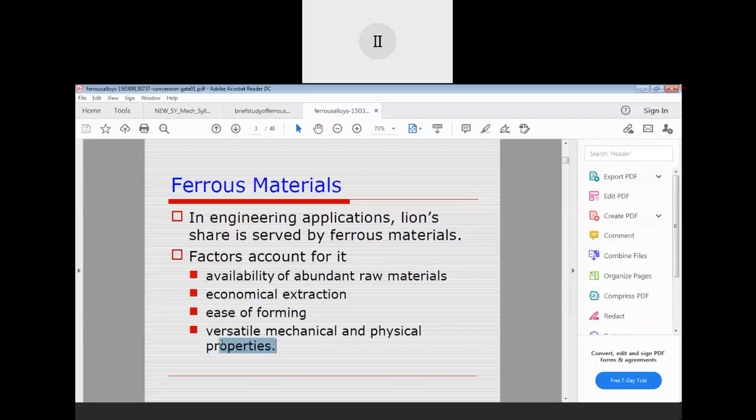Drawbacks of ferrous material. As this is very easily available, and we told that different types of mechanical and physical properties are available, at the same time there are a few drawbacks also, because no type of material is fully satisfactory in regard to all aspects of application. Okay, so there are a few drawbacks of ferrous materials. The first one is poor corrosion resistance. Ferrous materials are not very corrosion resistant.

Okay, then they have high density and low specific strength. Ferrous materials have high density and low specific strength. Okay. Then low thermal and electrical conductivities. Ferrous materials have very low thermal and electrical conductivity.

So these are the drawbacks due to which we are going for advancement of materials. Few disadvantages are always there, so we have more scope to develop new material, right? To overcome these drawbacks. So like we are telling that ferrous materials have poor corrosion resistance. So to overcome this, to have some material with high corrosion resistance, we can develop a new material, right? Or same way, if we want high thermal and electrical conductive material, then we can make different non-ferrous materials.

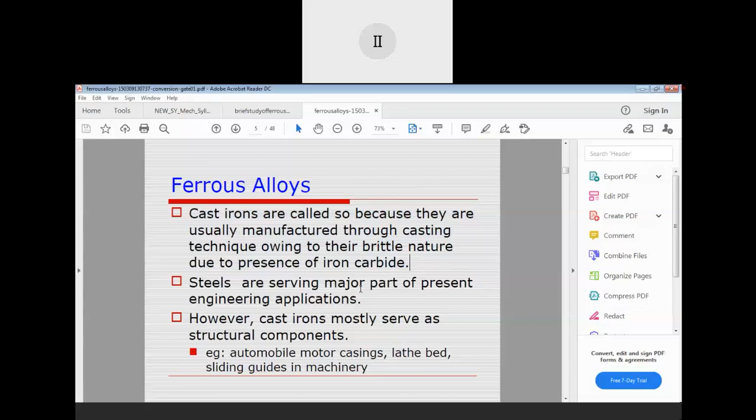Yeah. So now our next topic is ferrous alloys. Okay. Cast irons are called so because they are usually manufactured through the casting technique, owing to their brittle nature due to the presence of iron carbide. So now we will see different types of ferrous alloys. Before starting, here in your syllabus we have different types of irons: cast iron, white cast iron, and malleable cast iron. So let us see a few types of ferrous materials.

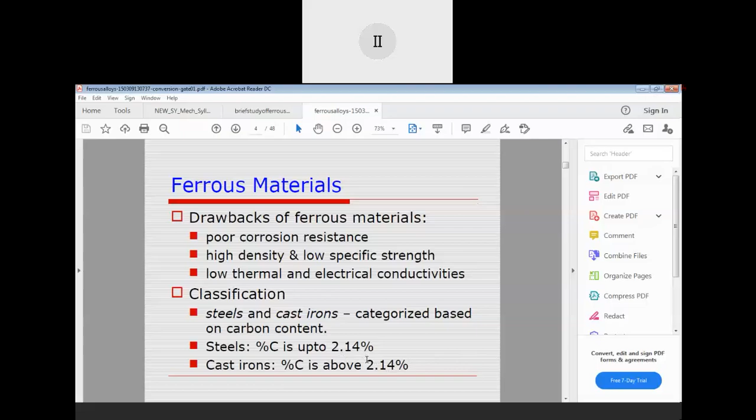In pig iron, the carbon percentage is 3.5 to 4%. There are other chemical properties too, like silicon, which is 1 to 3%. Manganese is 0.1 to 1%, phosphorus 0.2 to 1.5%, sulfur less than 0.5%, and the remaining composition is iron. This is the very basic step of iron.

This is the basic phase of raw iron. When we discuss pig iron, you need to remember their percentages - at least the carbon percentage, and it would be better if you can remember the other properties too. In pig iron, carbon percentage is 3.5 to 4%.

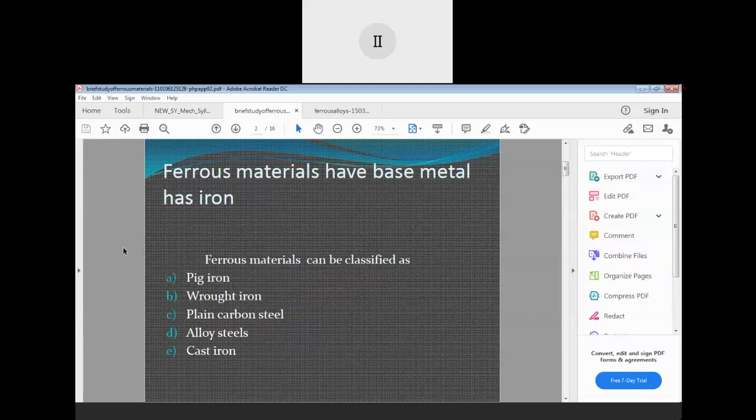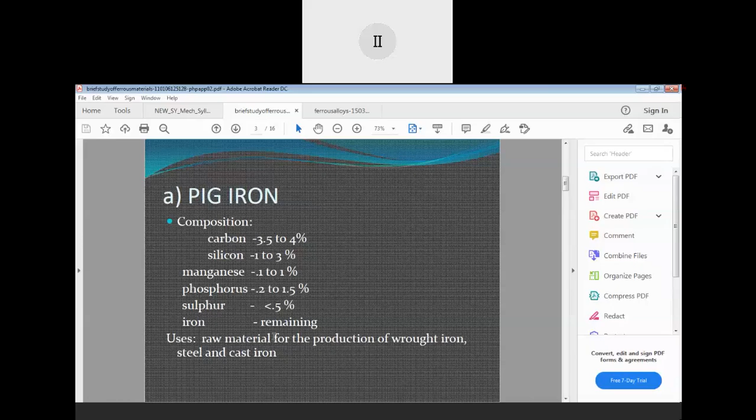If you see pig iron, wrought iron, or cast iron, you may notice very little changes in carbon percentage, but with these little changes, their properties change hugely - both mechanical and physical properties. Pig iron, as I told you, is the very basic phase, so it's used as raw material for the production of wrought iron, steel and cast iron. They are used for those purposes only.

Now wrought iron - they are produced from pig iron. How are they produced? By puddling process or by Byers process. If anybody is interested, you can check these processes in detail.

In wrought iron, we have 0.12 to 0.15 percentage of carbon. It contains high ductility and can be easily forged and welded. So in wrought iron, the properties are: highly ductile, and welding can be done very easily.

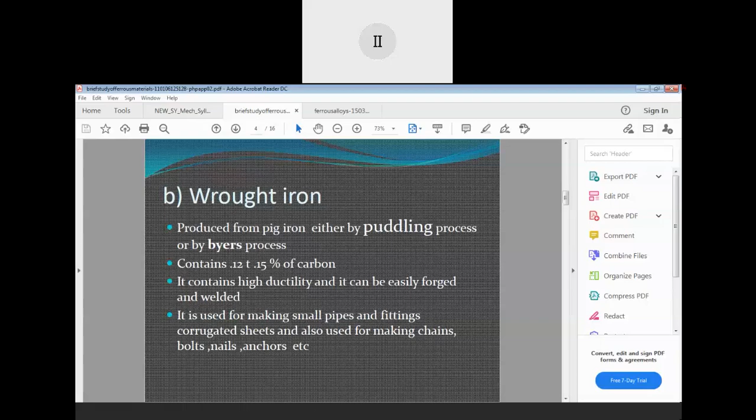Wrought iron is generally used for small pipes, fittings, corrugated sheets, and also used for making chains, bolts, nails, anchors, etc. Because you can easily forge and weld chains and bolts, and they are very highly ductile. Due to all these reasons, wrought iron is used in making small pipes, chains, bolts, nails, anchors, etc.

Next is plain carbon steel. Steel is an alloy of iron plus carbon plus small quantities of silicon, manganese, phosphorus, sulfur. So plain carbon steel is an alloy of components like iron plus carbon plus very small quantities of silicon, manganese, phosphorus, sulfur, etc.

It mainly depends on the amount of carbon content. So by depending on the carbon content, plain carbon steel can again be classified into three categories: low carbon steel, medium carbon steel, and high carbon steel. These different types of steel depend only on the percentage of carbon.

In low carbon steel, you will find carbon percentage is 0.08 to 0.3%. In medium carbon steel, meaning more percentage of carbon, it's 0.3 to 0.6%. Whereas in high carbon steels, the carbon percentage is more than 0.6%, but below 1.5%.

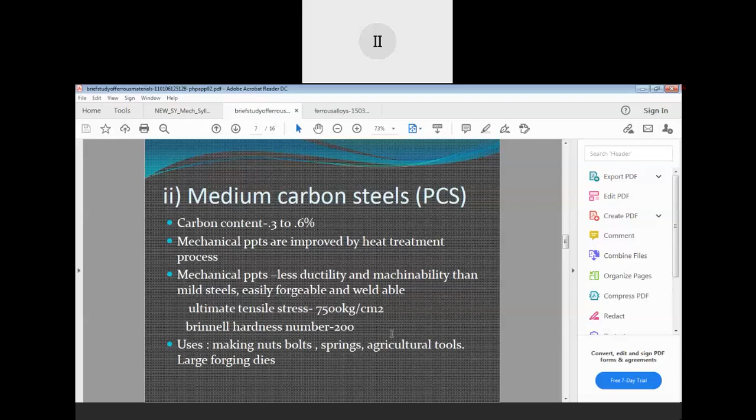So where can we use this medium carbon steel? We can use it in making different types of nuts, bolts, springs, different agricultural tools, and dies for large forging. These are the components we can make using medium carbon steel. Now, what about high carbon steels?

In high carbon steel, the carbon content is 0.6 to nearly 1.5%. Mechanical properties are further improved by heat treatment process, like medium carbon steel.

Their mechanical properties are high strength and hardness, then low ductility and low malleability. These are the different mechanical properties for up to 0.8% carbon content.

Ultimate tensile strength also increases with the increase of carbon percentage. Here you may find 9500 to 11,000 kg per centimeter square ultimate tensile strength for high carbon steel. Their Brinell hardness number is 550.

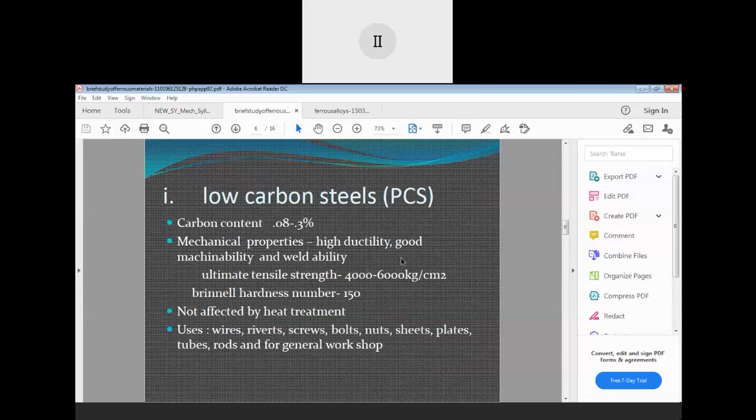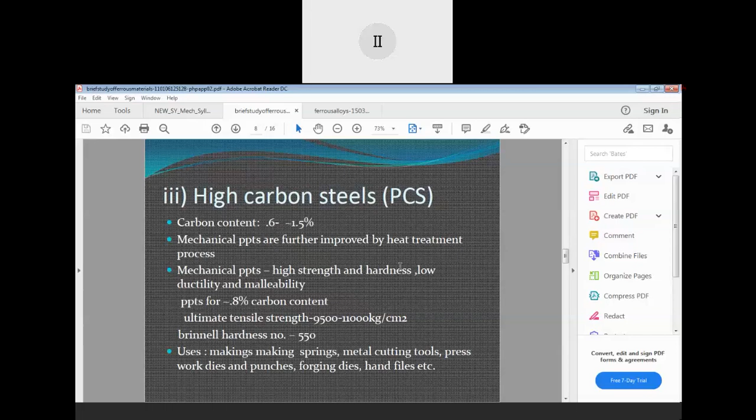So with these three types of carbon steel - low carbon steel, medium carbon steel, and high carbon steel - you may find that with changing just a few percentage of carbon, their mechanical and physical properties change drastically.

Now next is alloy steels. When we discuss different types of steel, we find that their carbon and iron percentages are there, but their properties are not good enough for higher applications, for application in places where extreme conditions exist. So to be applicable in higher, more critical situations, we use different types of metals with iron and carbon, making different types of alloy steels.

So other than iron and carbon, other metals are used to attain better properties. Why do we generally use alloying elements in steels? These are the reasons: to increase hardenability, to increase different mechanical properties, to increase corrosion and wear resistance.

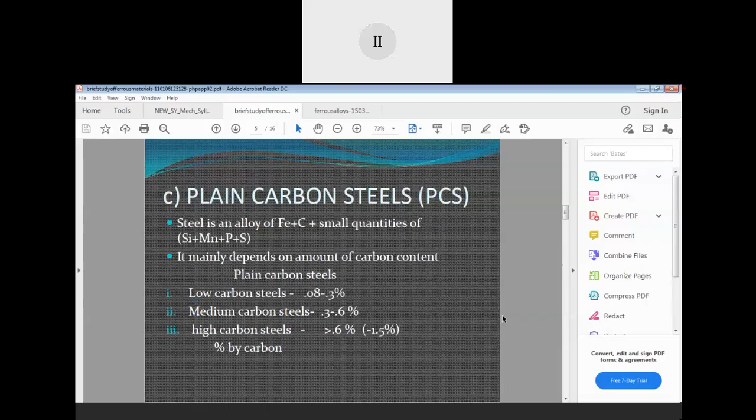Now, in your syllabus, you can see there's a point on the influence of alloying elements. So we have discussed the purpose of alloying, and different alloying elements. Now we will see their effect on enhancing different characteristics.

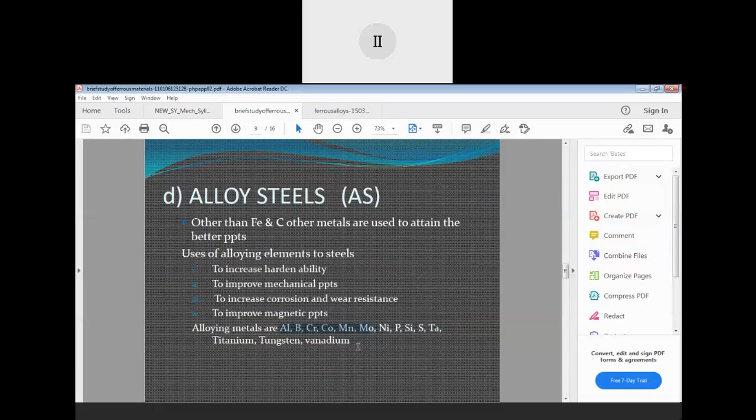So aluminium. We have discussed different types of alloying metals. Now we will see the different types of alloying elements, what are their applications, what is their influence. We will see in detail about the influence of alloying elements. First is aluminium. What is the influence of alloying element aluminium as an alloying element in steel?

Deoxidizer. It restricts grain growth. In small quantities, it increases strength, but too much gives embrittlement. 2 to 5% imparts resistance to heat and oxidation. As you can see, we can add different alloying elements to steel, but we can't add as per our wish. There are some limitations. If you increase more, instead of increasing the mechanical properties, you will find that the mechanical properties get decreased, or whatever properties it already has, we are losing them if we add more percentage of alloying element.

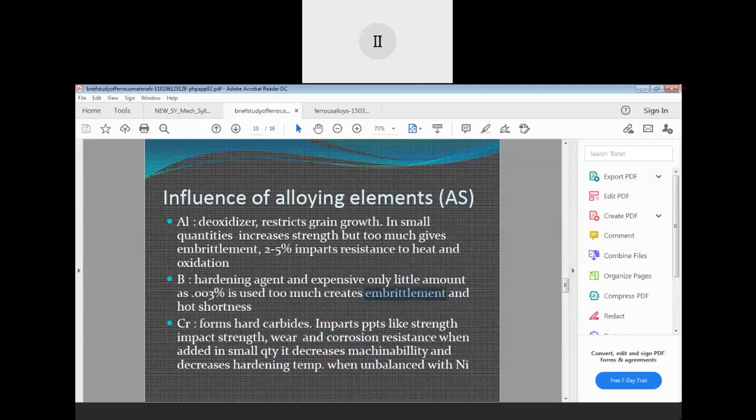Next, there are lots of alloying elements. We need to go quickly. Cobalt gives red hardness by retaining high carbides on heating. Then it can decarburize during heat treatment. It increases strength, residual magnetism, and hardness when added in small quantity. But if you add it in high quantity, it will decrease your impact strength.

Then copper you can add 0.1 to 0.4%. That is good for your material. If you add copper in that quantity, it will increase resistance to atmospheric corrosion, and it will act as a strengthening agent.

Then manganese: it is least expensive, used for deoxidation and desulfurization of molten steel. So manganese you can add as 0.4 to 1%. It will increase your tensile strength and hardness. If you add it in more quantity, it will lower your critical temperature, and it becomes austenitic and possesses toughness with ductility.

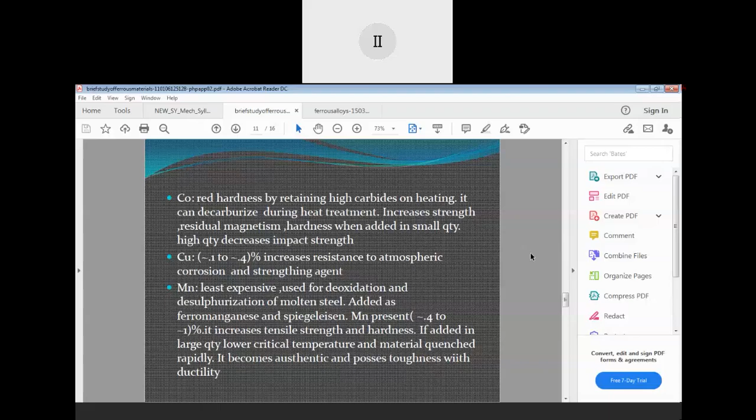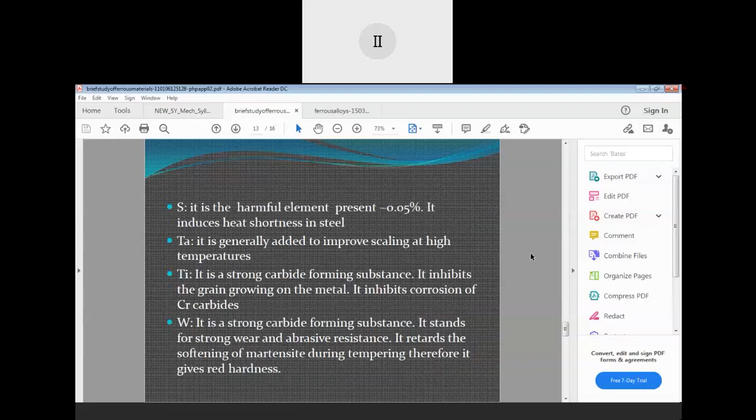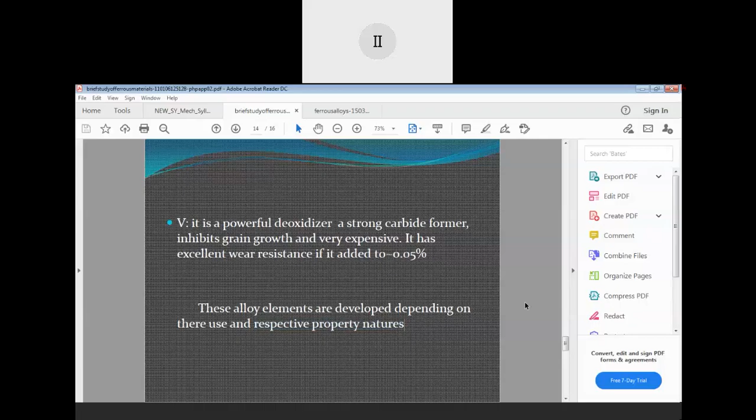So you need to understand how the different alloying elements influence the steels. These are the many others, so you have to understand this; we are not going through all those things. As I already told, the reasons we add alloying elements are their application and properties: to change their mechanical and physical properties and to use that material in different applications. We add different types of alloying elements in different percentages, all to improve its properties.

Now if you talk about steels, there are different types of special purpose steels. These are generally formed to satisfy particular needs, for some specific application where specific properties are needed. They are classified as high speed tool steel, high chromium steel, stainless steel, high nickel steel and high nickel alloys, austenitic steels and alloys, and heat resistant steels. From the name itself, like heat resistant steels or high speed tool steels, you can understand their purpose and application.

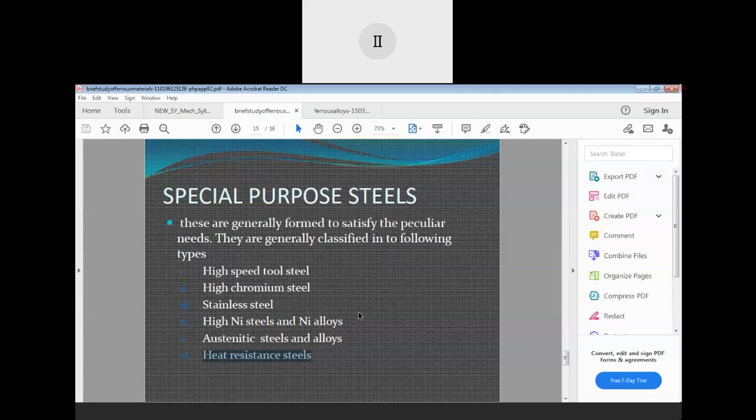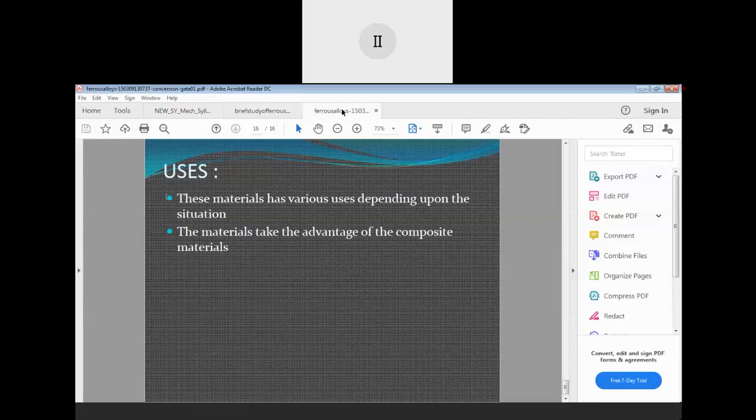As I already told, these materials have various uses depending upon the situation. The material takes advantage of composite material properties, of how they work. So these special purpose steels have different types of application depending on the situation. So we have discussed different types of steels.

Again, some more basics about steel in detail. Steels are one type of alloy whose major component is iron, with carbon being the primary alloying element. What are alloying elements? We have discussed already. Those elements or materials which increase the strength of different types of irons through their effect on the matrix. Like composite material, here also they form different types of matrix, and their effect increases the strength.

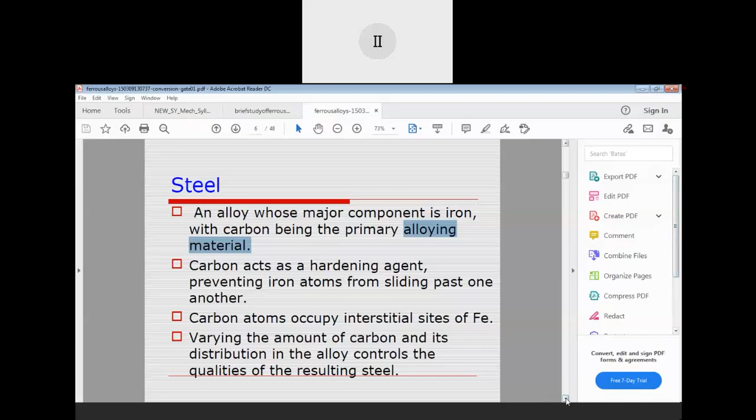Then varying the amount of carbon and its distribution in the alloy controls the qualities of the resulting steel. So how much carbon percentage you are adding, as well as how you are distributing that carbon in the alloy, will give you the quality of steel you want. Those two things are important.

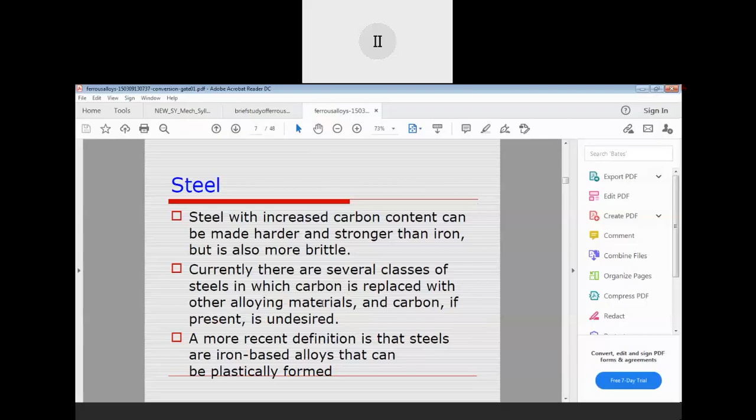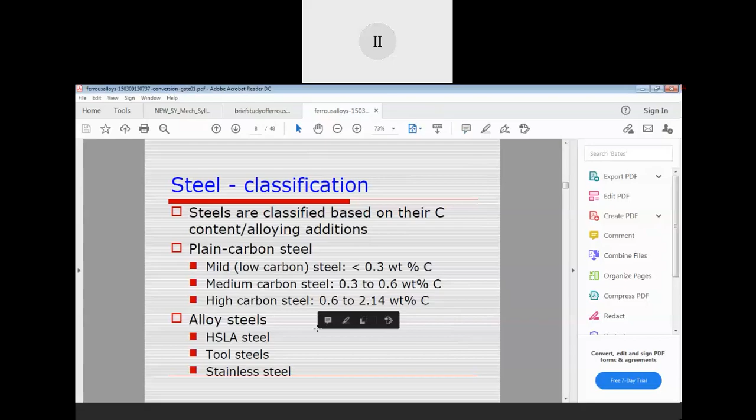So today up to this, and tomorrow we will see about different types of steel, which we already discussed, and maybe we will go a little bit further.